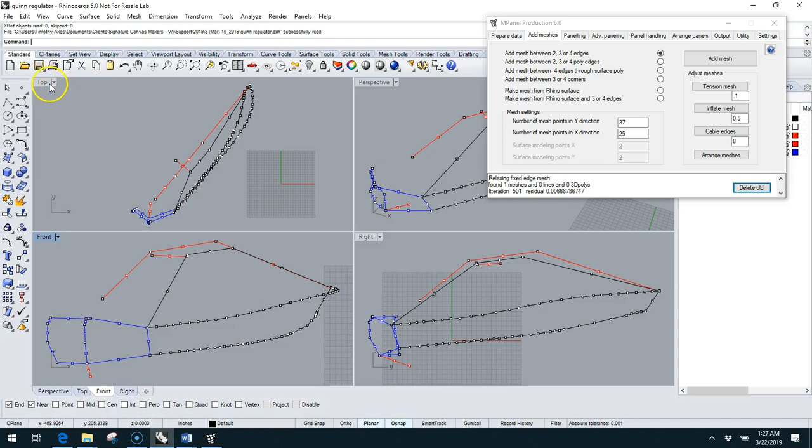What I'm going to do first is, and we're in Rhino, and so we've got a top view, a perspective, a front, and a right view. The very first thing I'm going to do is I'm going to go to the top view. And because this is taken on a boat that was probably on a trailer or located somewhere potentially off the water, we're actually seeing that the front of the boat is lined up towards the top of the screen.

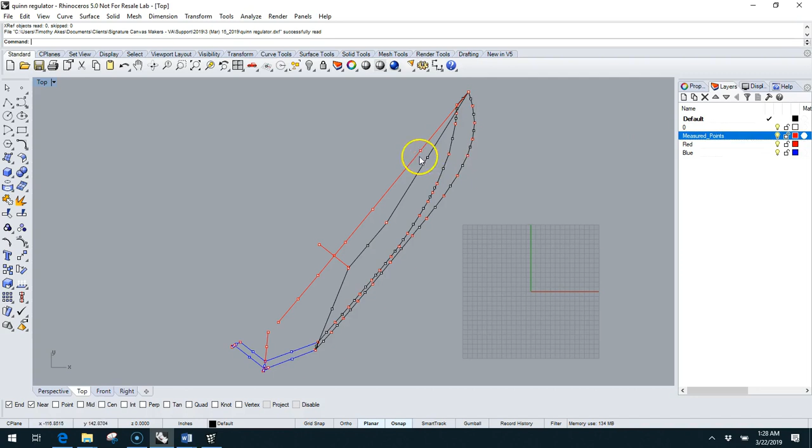The very first thing I'd like to do is make sure all the points are on. It looks like this has some additional points that were the measured points taken here. So I'm turning all the layers on, so that I have all the data. I'm going to select all of the information in Rhino, and I'm going to use something called Rotate 2D. So I'm going to left click on that.

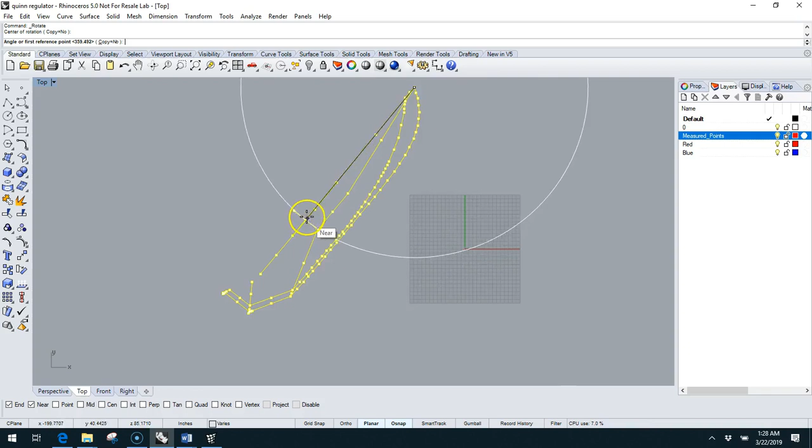I'm going to grab the top point up here, and I'm going to grab a point right here about the midpoint. I want to make sure my nearest is shut off. I want to grab actually that point. So on my O snaps, I'm going to make sure point is on. I'll grab that point, and I'll also turn on ortho. And what that's going to allow me to do is to rotate the boat so that the front of the boat is here.

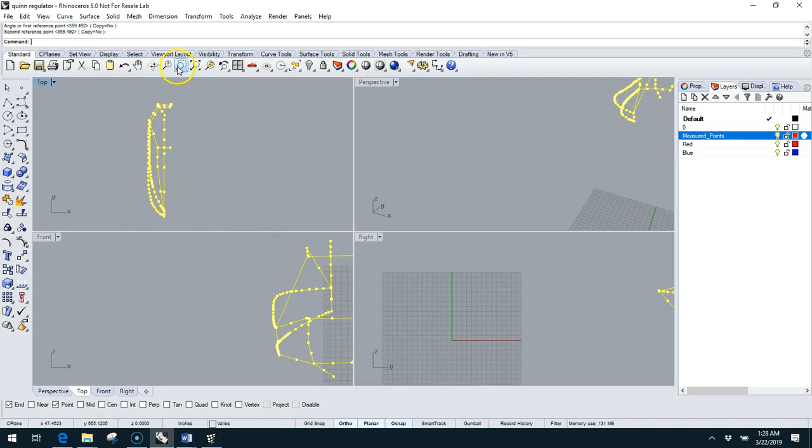And what that allows me to do now is, if I zoom extents on all screens, the front is going to be looking like I'm at the front. The sides are going to be here. What I'm also going to do is in the right view now, I'm going to grab all the boat. I'm going to click on rotate again. And from a right view, I'm actually going to rotate this information so that I'm ortho.

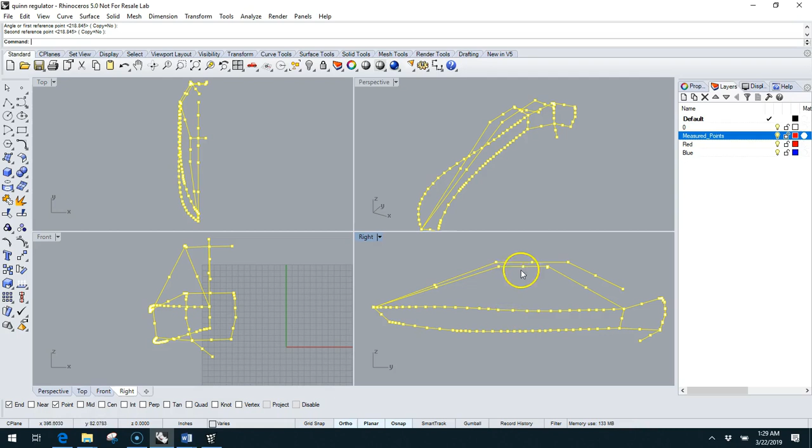So what I've done here is I've rotated the boat so that from a top view, I've got the center line of the boat straight up and down. Also, from the right view, I've rotated some of the lines so that I'm actually looking at a boat like from the right side. Okay. So with that being done, I'm going to go to the top view again. And all of this is happening in Rhino right now.

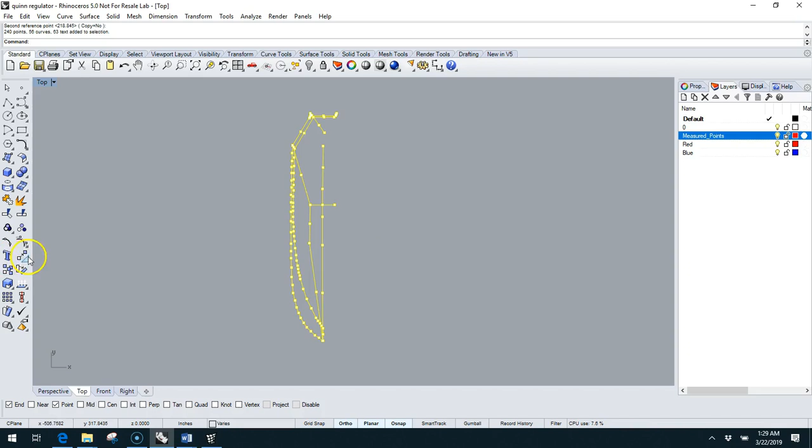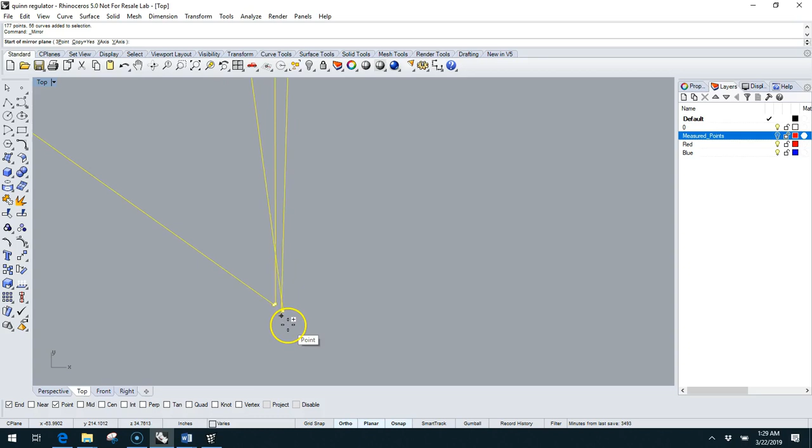So I've got half of the boat recorded. What I'm going to do is select the whole boat. I'm going to go ahead now and shut those measure points off and select it. And I'm going to use the Rhino mirror command. I'm going to mirror, and I'm going to grab a point up here at the front of the bow, and I'm going to grab the farthest most point. So I believe that's going to be right about here. And I'm going to mirror this boat to about that center point that we used before.

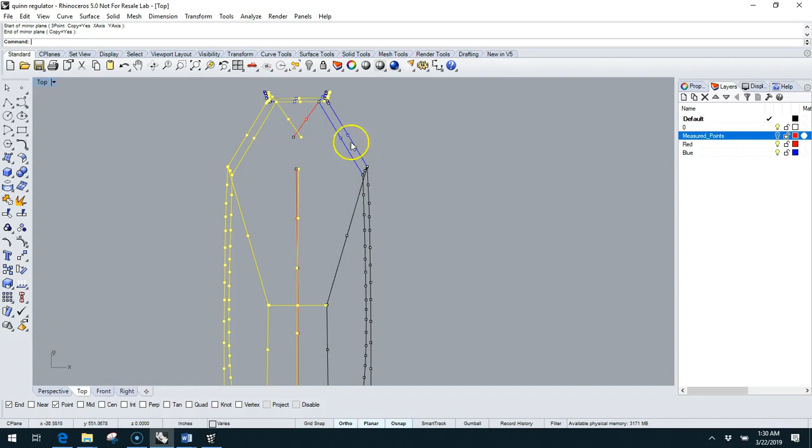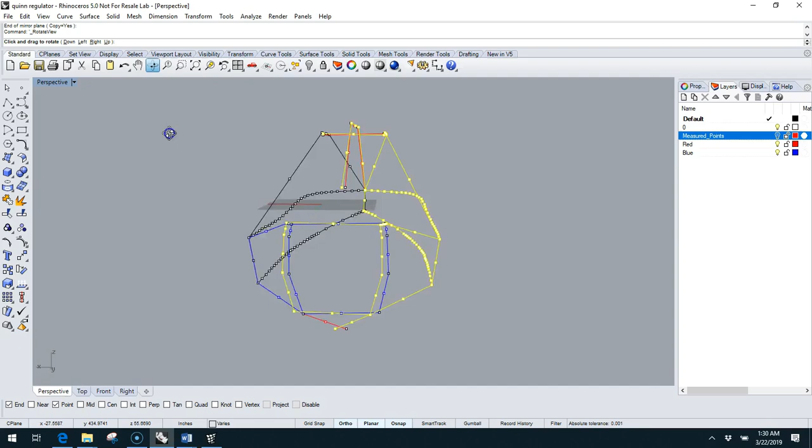Now, I see a couple of crosses here in this point, but if I mirror to about the middle of that T-top that's coming off, I think that's a really good approximation of where the center of this boat is. The center line typically should be right down the middle, but it seems to vary a little bit on this boat. I think that actually is a pretty accurate spot. If I take a look at this in perspective view, it looks pretty close, and I think the T-top's really good here.

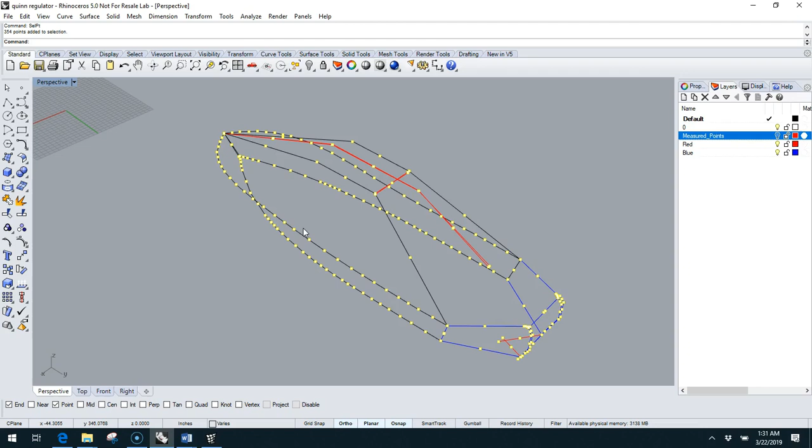Okay, now that I've got the boat mirrored, the one thing I've got is a lot of points on here. So I'm going to use something in Rhino called SELPT. Make sure I'm in the command line, SELPT, select points, so every point on the screen is selected. I'm going to just type hide, and that doesn't get rid of the points, it just cleans them up, it hides them.

The next thing I'm going to do is over on my layers tool, I'm going to right click on layers and say new layer. I like to call this layer trace.

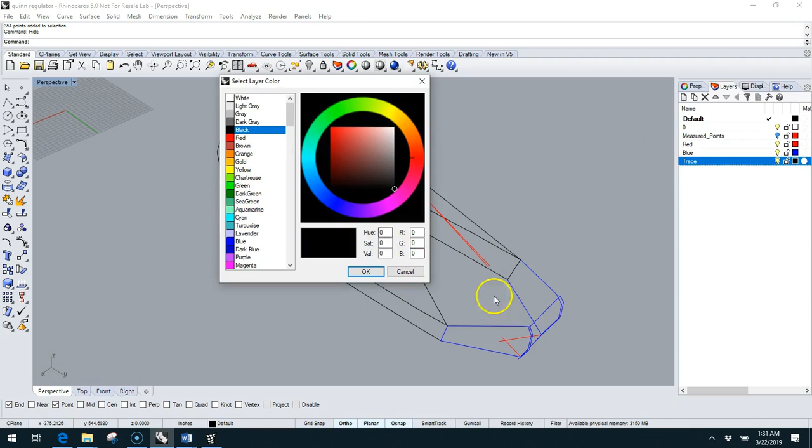I'll turn off my caps lock and turn on trace. I'm going to select a color that's not on my screen, I'll use green for this trace layer, then double click to make that my current layer, so everything I'm drawing now will be on a layer called trace.

So what I've done is take the data that was here. I don't want to destroy this data or start moving it around, like grabbing a point and saying it should be over here, because this is what was actually recorded from the laser data. I don't want to destroy that.

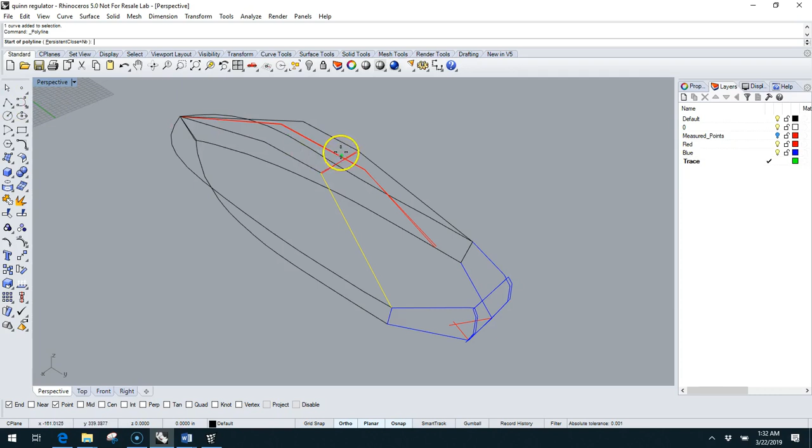But what I am going to do is start a layer called trace, and use this data. I'll go from this endpoint over to this endpoint, then come up over here to this endpoint, and start tracing this out a little bit, up to the very bow of the boat.

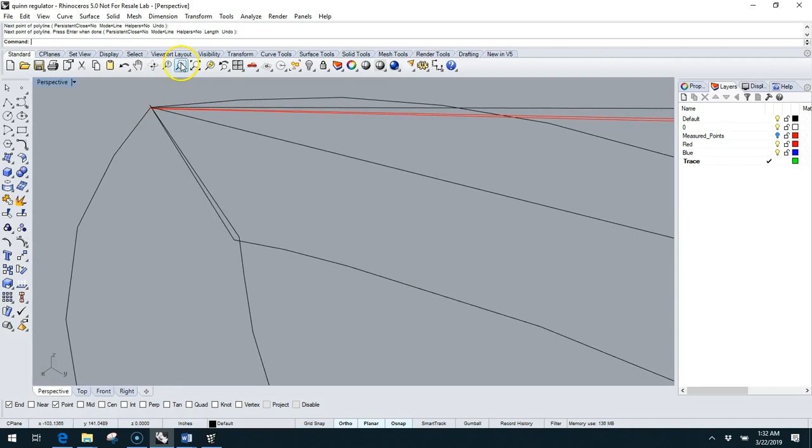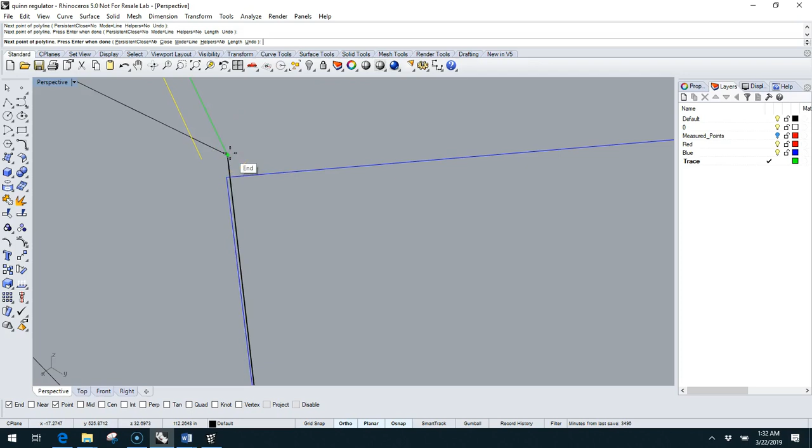I might even grab a window, and I want a line from that front line right there, down to the endpoint, and the endpoint right here. When I've got a situation like this where several points come together, I'll pick something about in the middle. Actually, that looks like a really good point to me.

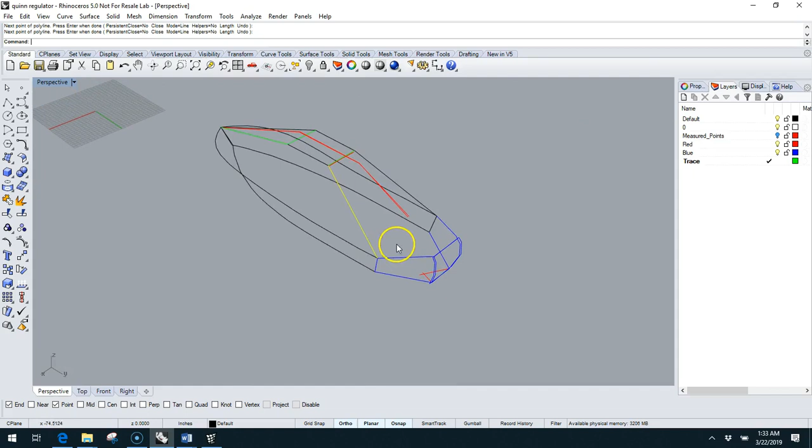Sometimes we're talking about something so close here that it's maybe just a sixteenth of an inch off or something, so that looks pretty good there. Let's come around and swing over to the other side here.

Again, I'm going to grab the polyline or line command, either one you want to use, and grab the endpoint of that green line. I'll come up to the endpoint of this one, then down here to the endpoint of this one, and again come down here.

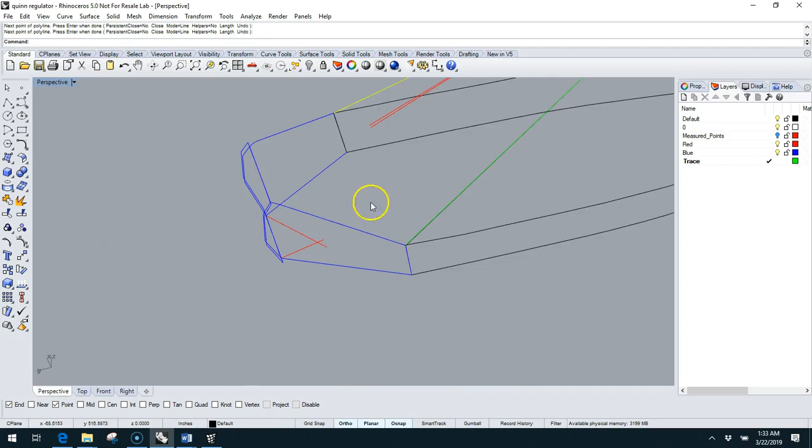I'm going to try to get, again, about the same point that I chose before, that blue line right there. That allows me to grab a line from the end of that green line to the endpoint of this green line.

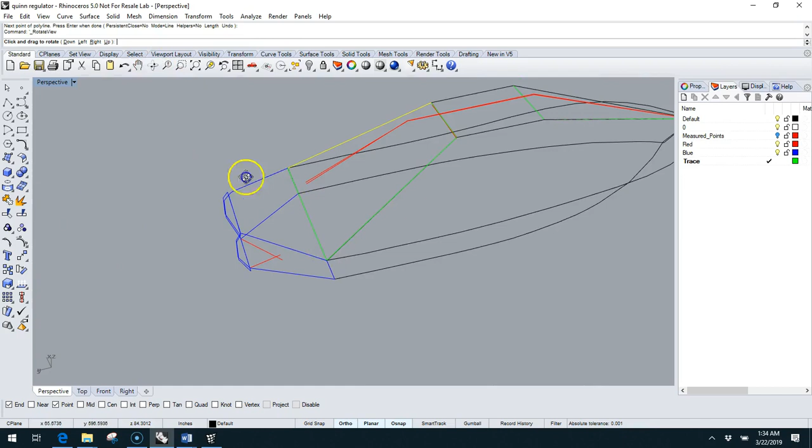Okay, let's continue on the boat. I've got several pieces selected here. Let's go to this back section, choose the line or polyline command, and grab that point back to.

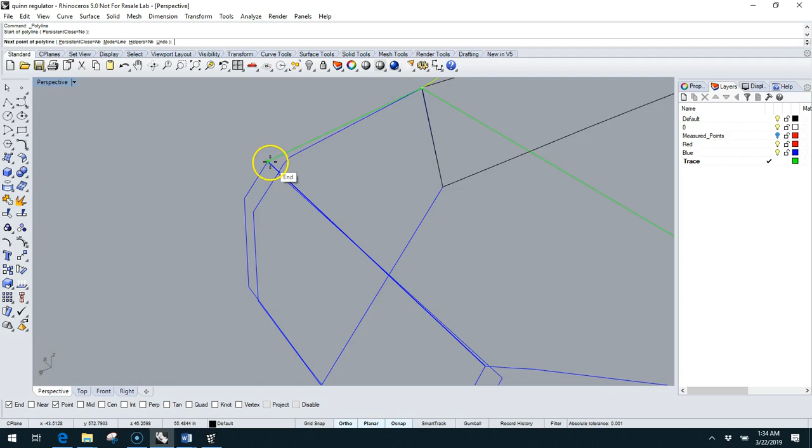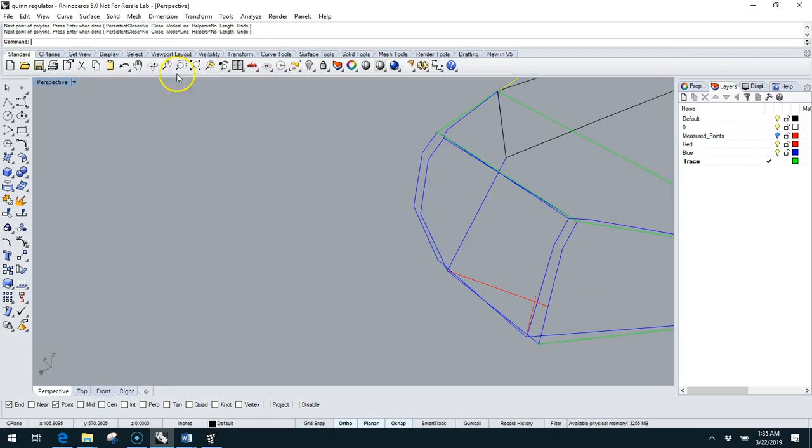Let's go from that endpoint down, out to this outermost point, and then we can follow the laser data up. Over here, let's get around a little bit and follow that laser data up.

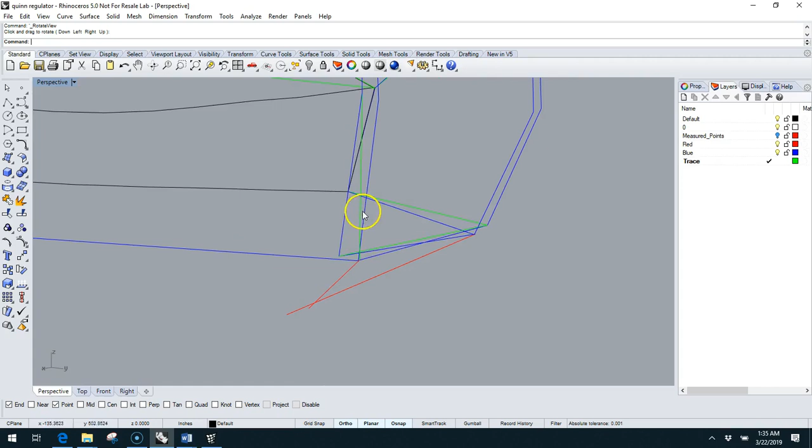Let's come over to the back of the green side here. I think right here I've actually grabbed the wrong point, so I'm going to come up here and use my curve point control points, and take that back over to the back side over here.

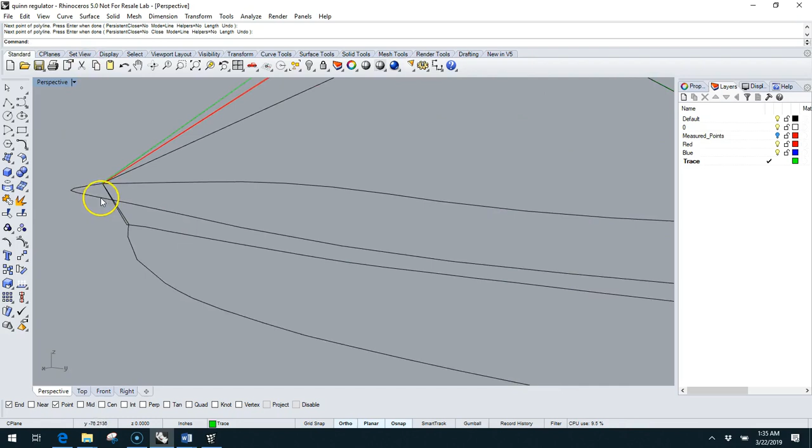From here, let's turn the control points off, grab the line command, and go from here to this corner, back up to those. Now what's pretty good is I've got this, let's go up to the bow up here in the front.

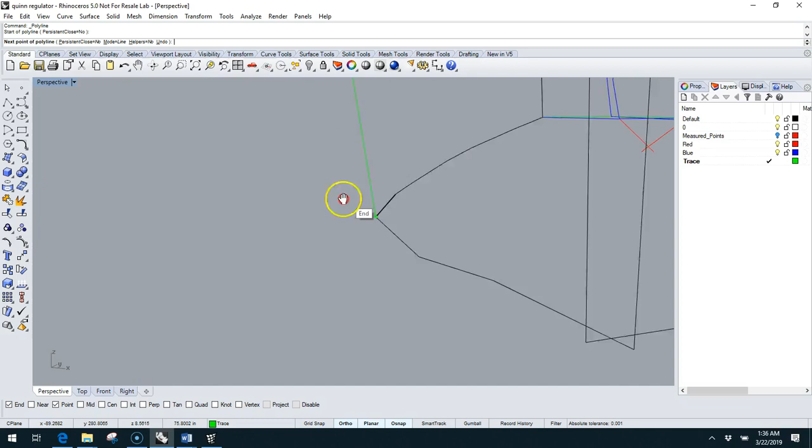I'm going to grab the polyline command, and go from the endpoint of my green line down to this intersection here. That looks like a good average between those two points.

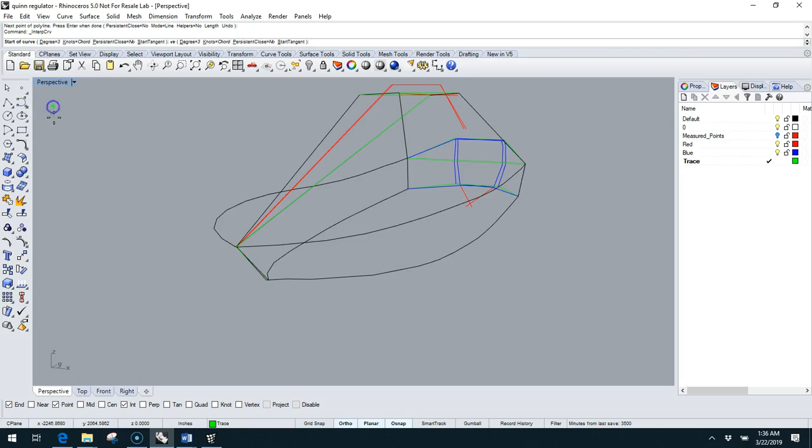Now I'm going to start tracing out and clean up these curved lines. For the curved lines, I'm going to click and hold on curve points, and come down to curve interpolate points. Let's start at the common bow line, which is my green line here.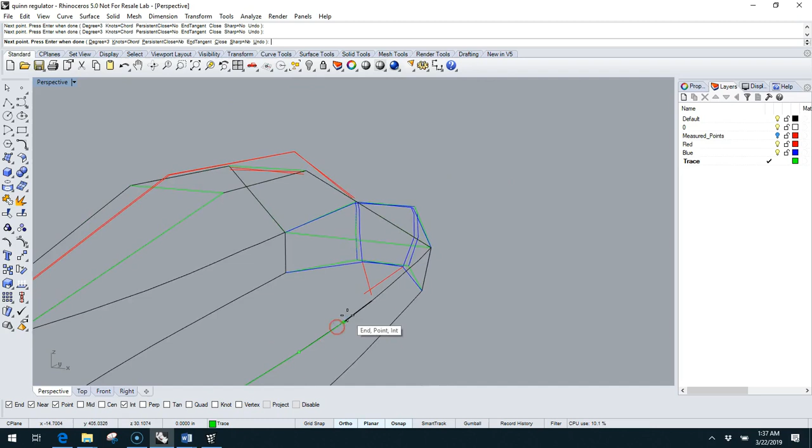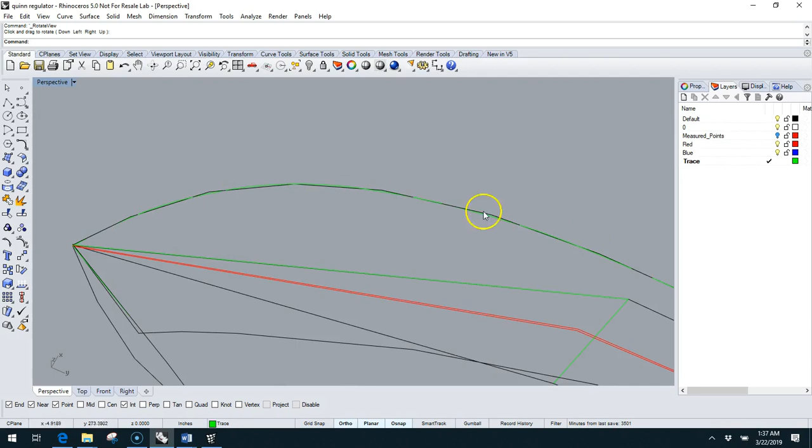For this, I am going to turn on the near object snap, and start working my way down following this line. You'll notice if I come down and grab about every 16 to 18 inches along that line, this looks like the rub rail line on the boat. I'll continue on, and at the end grab the endpoint of this. What that's done is given me a really good representation. I might be off a little bit here, but it's cleaned it up quite nicely and gives a good representation of the bow line.

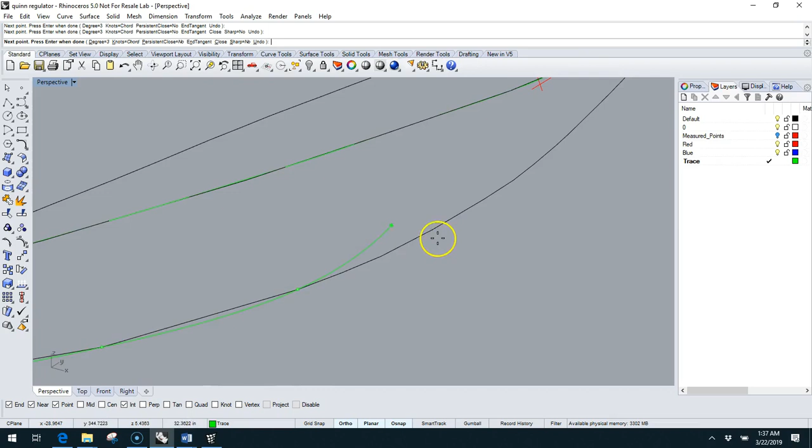Same thing on the bottom, using curve interpolate points, I'm going to grab the endpoint of the green line and start grabbing a few points. A lot of times the actual points taken are the high points, so I'm going to grab quite a few of the endpoints if I can, again about every 16 to 18 inches along that line until you get back to the endpoint, and done.

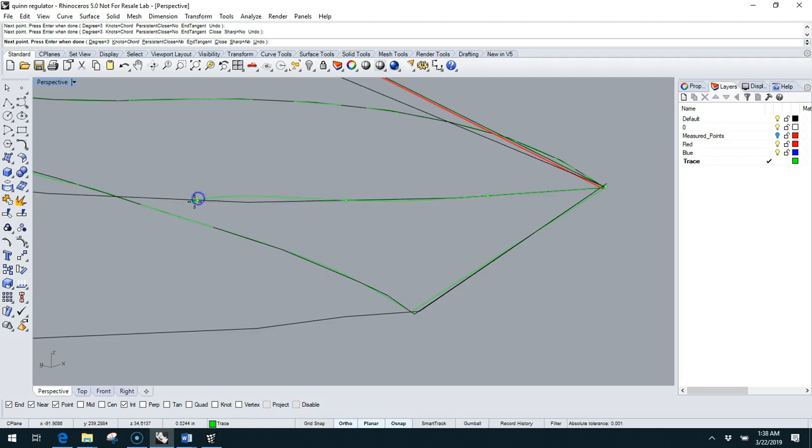Okay, that side looks good. Let's go back over to the other side and do the same thing. We're going to grab the endpoint - and I see right now I actually snapped to one of the incorrect points there. We're going to change that in just a moment. I'm going to start following my rub rail. Again, I'm not changing the laser data that was taken, I am just using it.

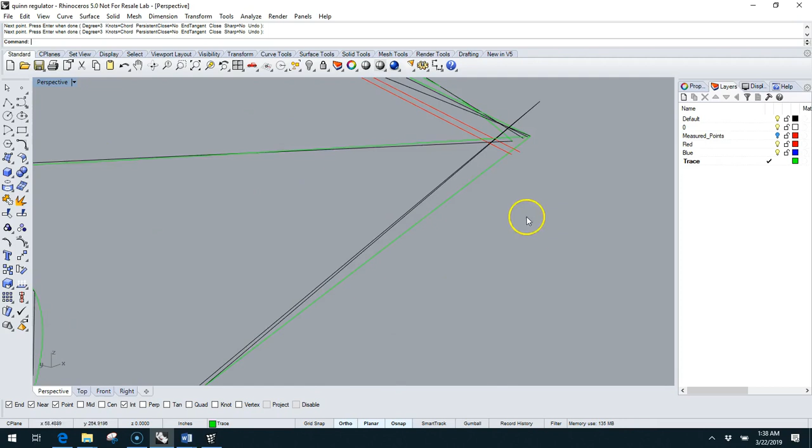Let's come here, and it looks like I've selected my first line. Let's turn the control points on. What's really great about Rhino is if you do something like grab the wrong line, it's very easy to correct that - I can just turn control points on and grab that line.

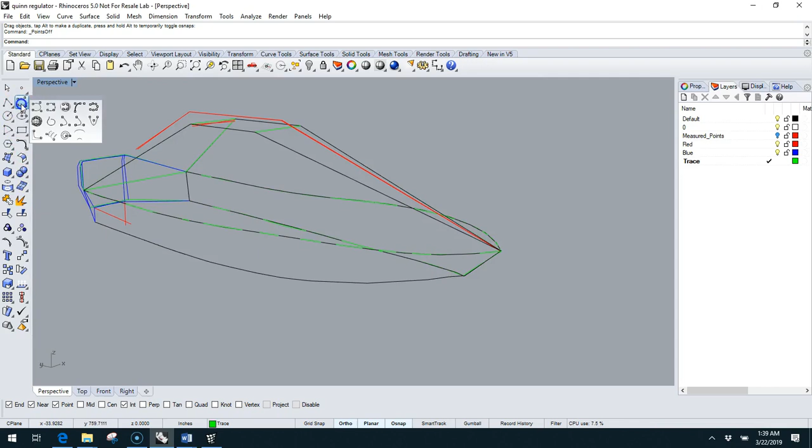All right, for the bottom, I'm going to go to curve interpolate points. I'm going to grab the endpoint here, and again, using most of the high points, like where maybe the laser was shot, I'll grab about every 16 inches along that and come to the endpoint.

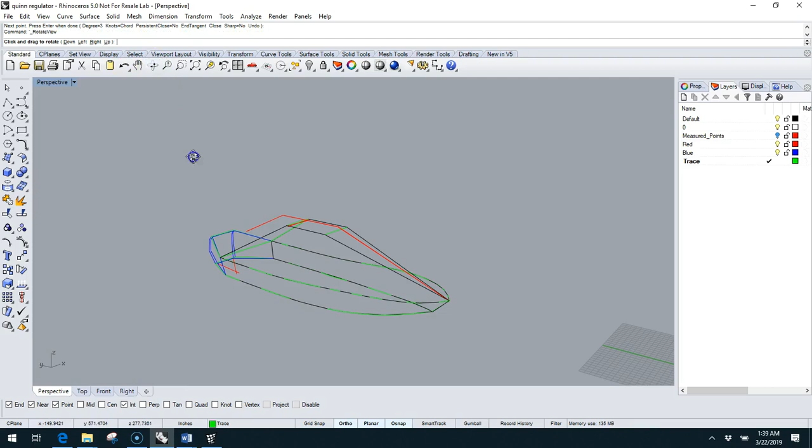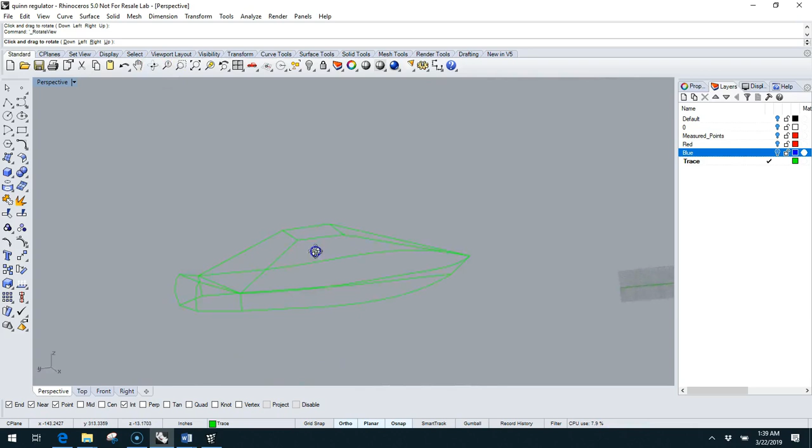So at this point, here's what it looks like I've got - it looks like I've got most of the data captured. What I'm going to do is come in and start turning off some other layers that we had, and you'll see that I have a pretty good representation now of the boat, and it's pretty much cleaned up - pretty much got a wireframe cleanup.

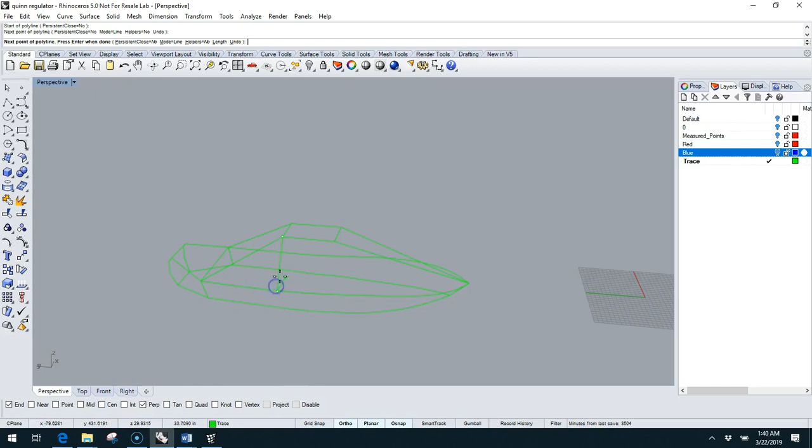Now, the one thing I am going to do is add a couple of additional pieces here. I'm going to add a line from here down, and instead of nearest, I am going to turn on something called perpendicular. What perpendicular is going to be is just straight down - a straight perpendicular shot from here down. Let's grab a couple of these lines perpendicular.

And what this is going to allow me to do is give me a little bit of extra detail in order to put my meshes in. Perpendicular, and perpendicular. So, all right.

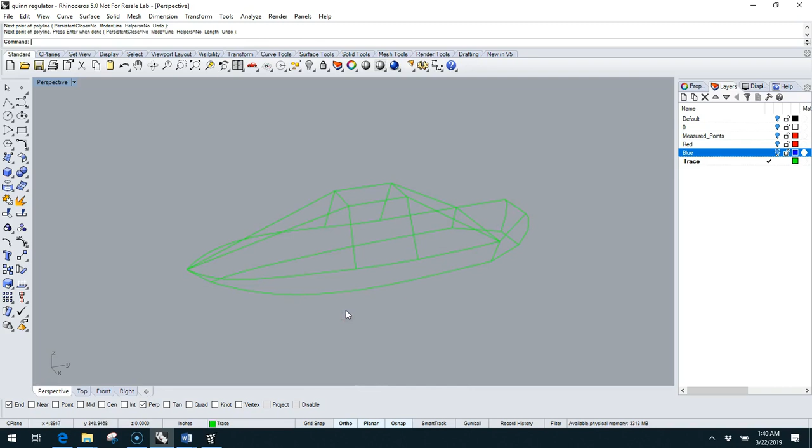So at this point, what I've got here is a cleaned up wireframe boat. All of my original data is still right here - if I turn the layers back on, you can see here's all the original data. But right now I can shut those off and just work with this layer called trace. And I am ready now at this point to start using this for some MPanel tools.

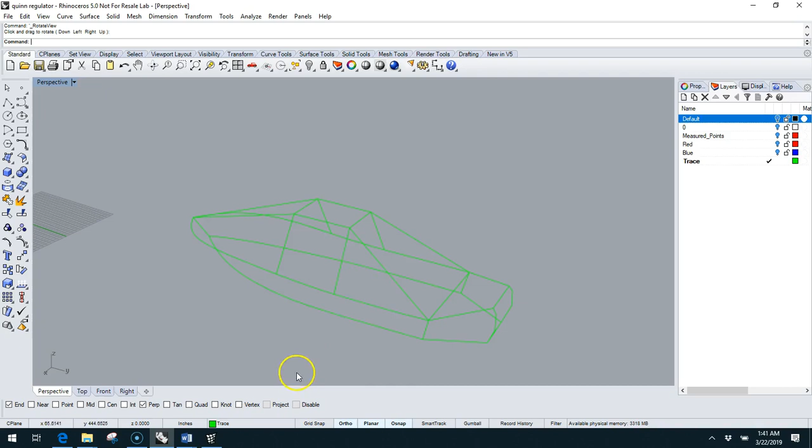All right, I've started MPanel-Production, and I'm using MPanel-Production 6.0. What I want to do here is, before applying a mesh, I need to start thinking about the zones and the areas that I'm going to deal with. Typically, you'd want a mesh that's not too dense, but not too light either.

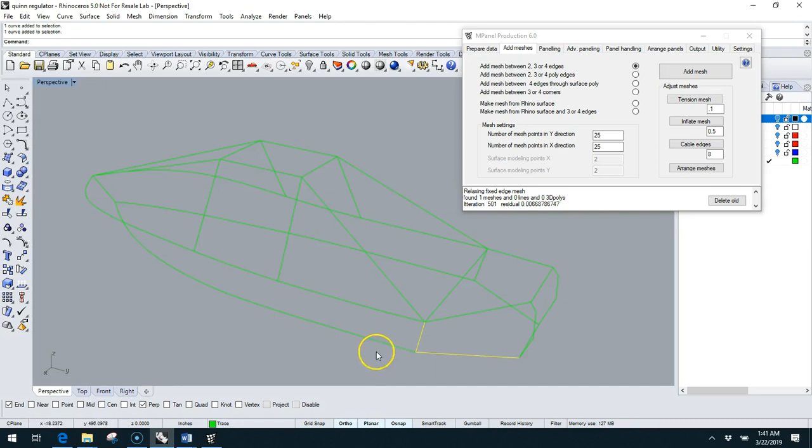We've got this long area right here. If I look at this data, that point right there, I used a polyline command on that. I'm going to choose a split command and select this other line because I want these to be individual lines. Same for this one here - split, choosing these two perpendicular lines. Now that is 3 lines. Same thing over here, split with those two, and now I've got 3 lines here.

I'm going to do the same thing for the rub rail, but first I need to apply the mesh on the bottom here. The one thing I'm going to do, because I'm going to put this on this direction, is this will be my bottom, right, top, and left.

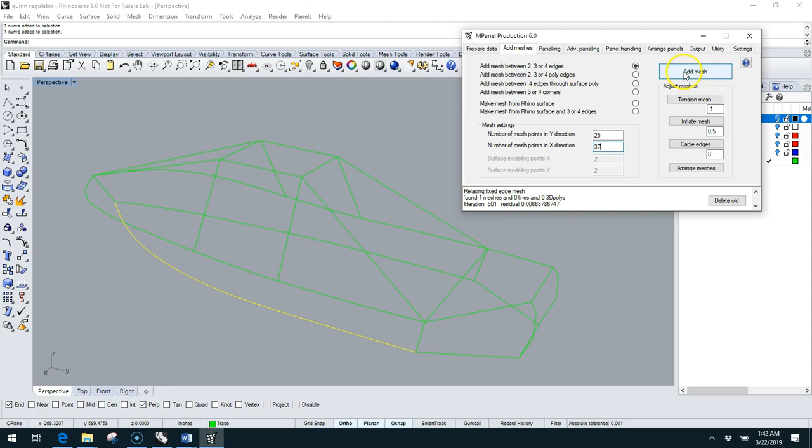I'm going to choose the bottom here and say 37 - I'm going to put a few more mesh points on the bottom. So I want to add a mesh between 2, 3, or 4 edges. I click Add Mesh, choose the bottom, right, top, and come back over to the left side.

Poor connectivity between top and right edges - that's asking me to ignore the gap, say no. If I zoom in here, I can see this line didn't quite get all the way back. MPanel is going to tell me if there's a problem. I can grab it, snap it right to the endpoint, right click to shut those off, and I'm good.

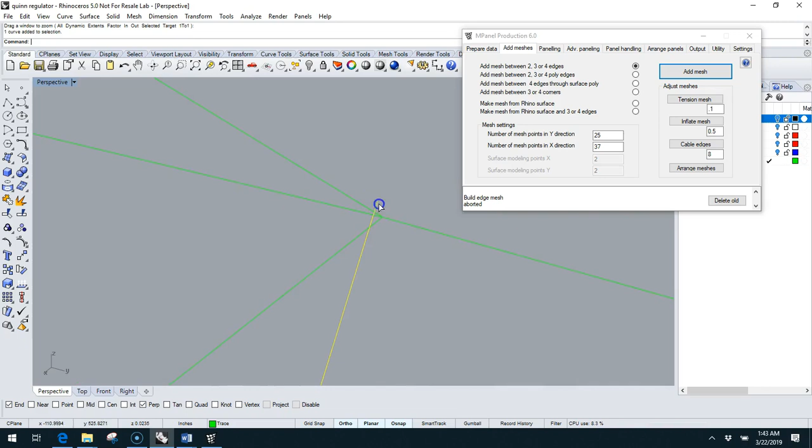Let's come over here and look. I think I'm good on this side. I'll zoom in a little bit just to make sure I didn't make that same mistake. And actually, I did make a mistake - right here, I can see that line should be snapped down to the endpoint. All right, let's shut those off.

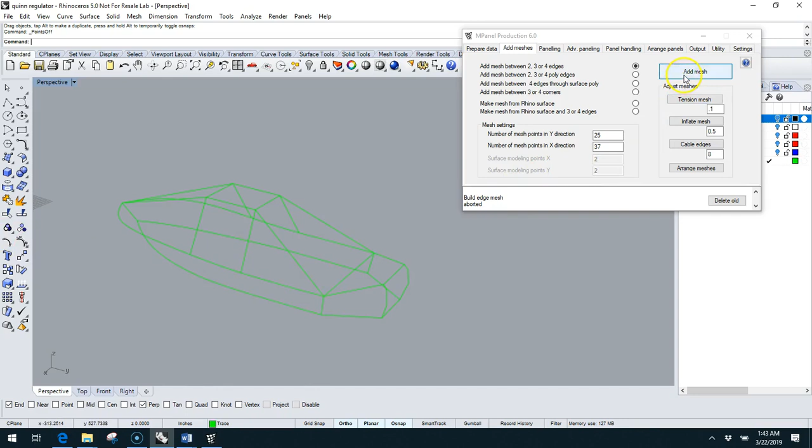So occasionally we are going to have some points that need to be corrected. Not a big deal - it's easy enough to grab that control point, left click that, go over, fix it, come back and right click it to shut it off. Again, bottom, right, top, and left hand side. Looks good. Let's swing around to the other side.

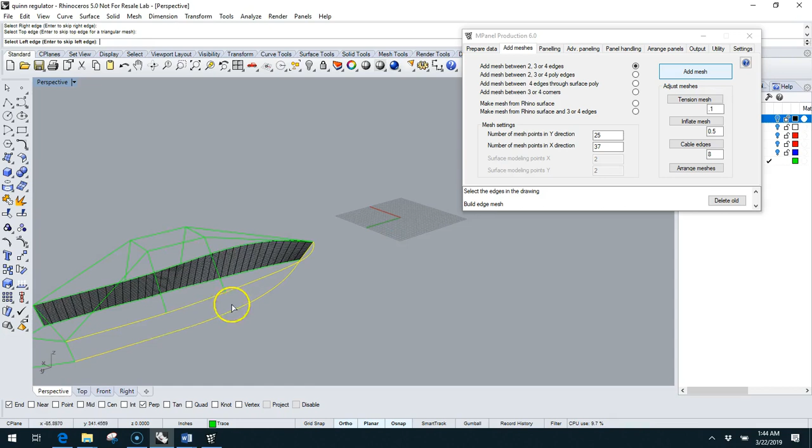At this point we'll do the same thing. We'll choose the bottom. This time the right is the bow line, top is the rub rail, and again I've got this part back here - say no, I didn't check this before.

I'm going to say let's split this. Use the split command, let's choose the rub rail and this back line right here. And now those are independent pieces.

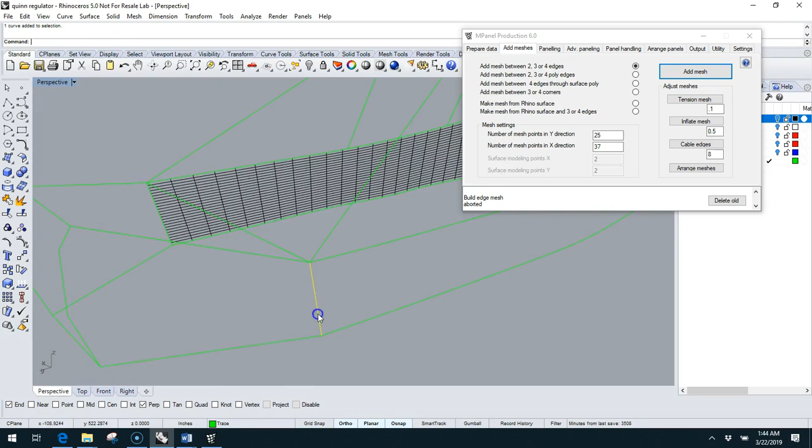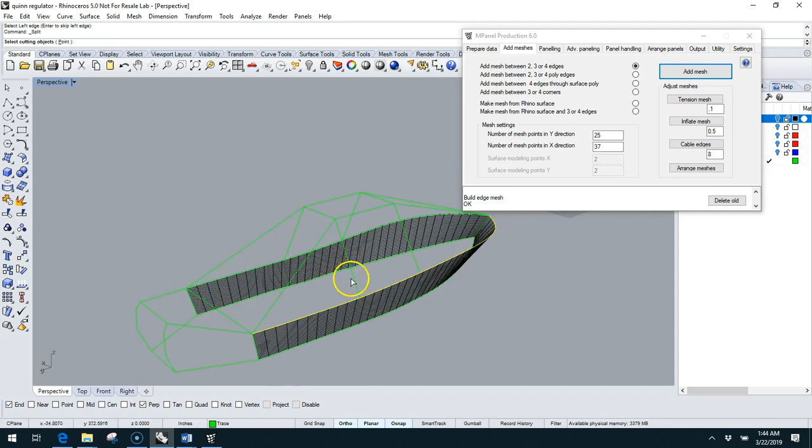Now I can click Add Mesh, bottom, right, and I'm going to choose the line. Top is the rub rail, left is this side. So now that I've actually used that, here's what I can do - I can select that line, say split, and now I can use those same perpendicular lines so that same rub rail I just used, and we'll do the same thing on both sides.

I'll select the rub rail, I'll choose split, I'll choose both those vertical lines, and now that rub rail - you know, I wanted it one piece for the bottom here, but I don't want it one piece for the next lines.

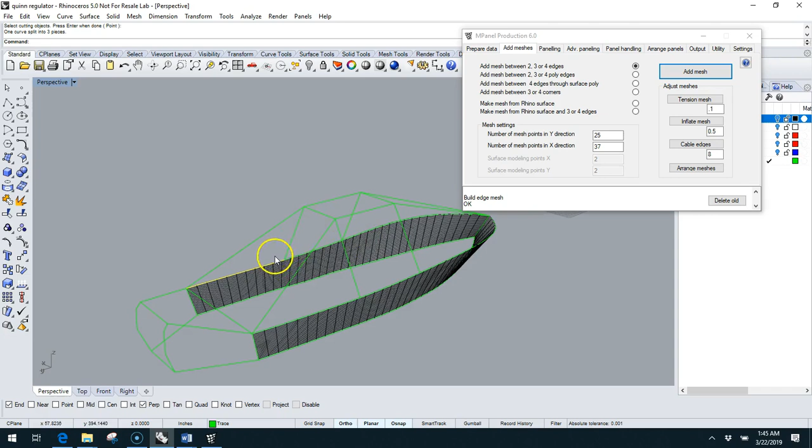So let's work around the boat a little bit here. I'm going to change back now, and I'm actually going to say 25 by 25 here, to get everything pretty much roughly to a uniform point. I'm going to say Add Mesh - the reason I used 37 here is because that's a longer run, I wanted more points on that. I'm going to say bottom, right, top, and left.

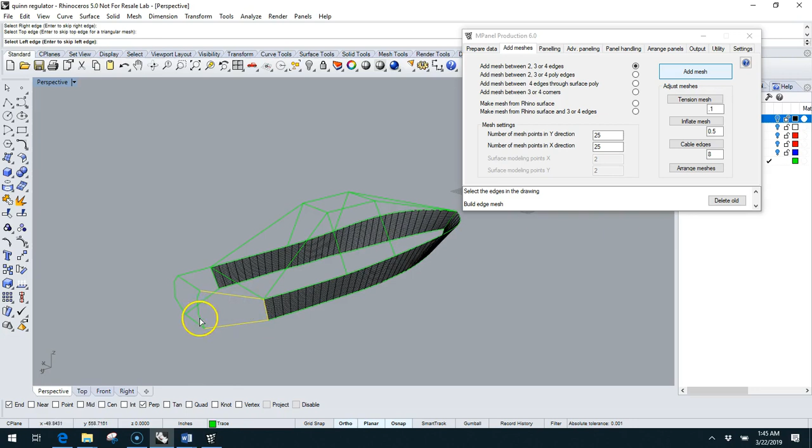Let's swing around, let's do the back side - bottom, right, top, and left.

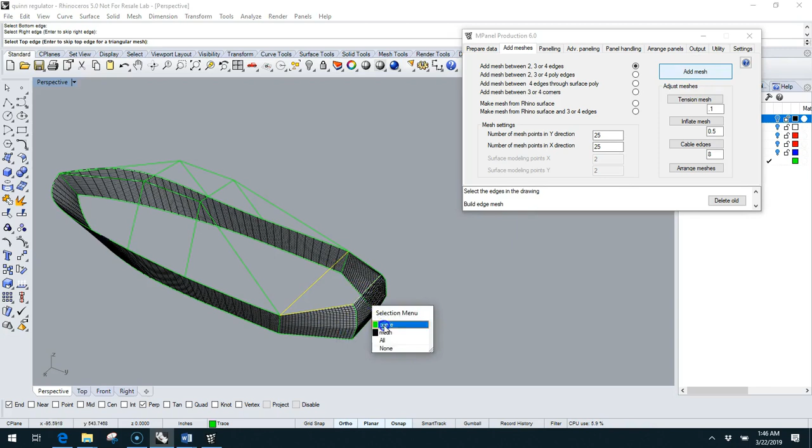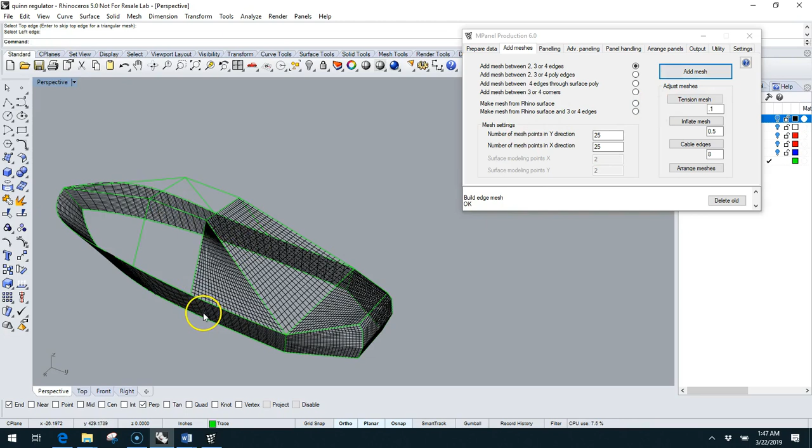So let's click on Add Mesh. I'm going to say bottom. I'm going to say right. Now, this comes to a point, so I don't have a top. I click Enter to say none for the top. Pick the left side. And that option was here, Enter to skip the edge. All right. Notice I'm rotating the boat so that I can kind of see all the edges.

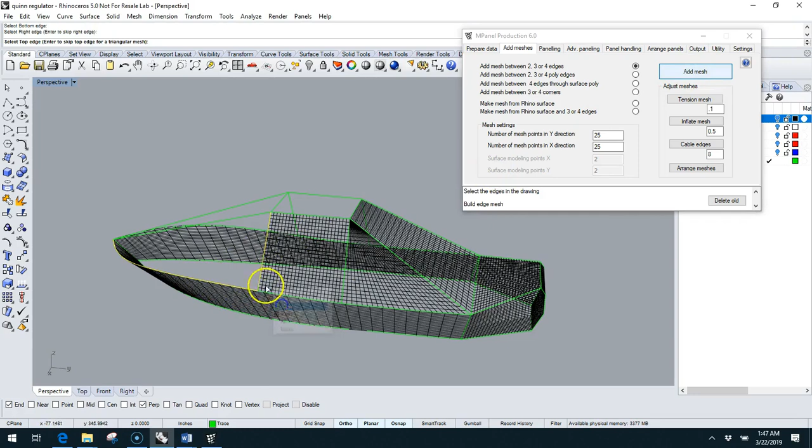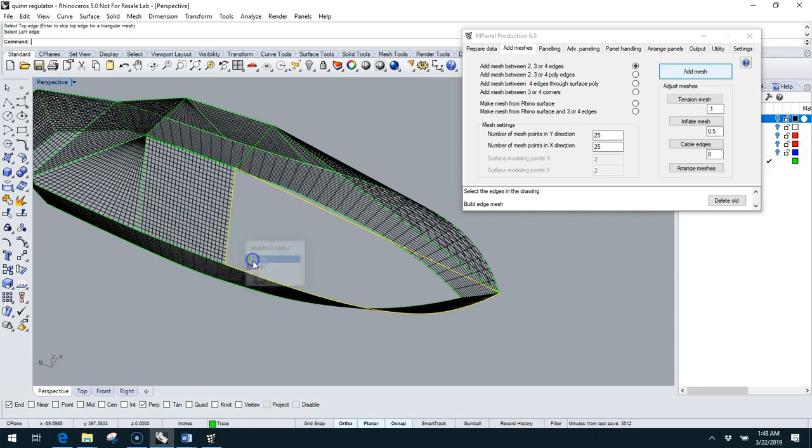Bottom, right, top, and left. And this one here, I'm going to say bottom, right, no top, and left. Let's do these last two pieces on here.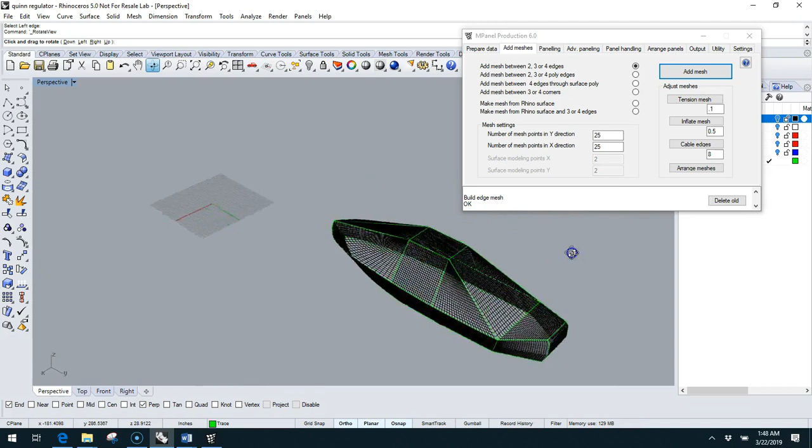So here in just a few minutes, what we've done is we've completely cleaned the boat up, and we've wireframe meshed it. Now at this point, I've got a couple of things. Number one is I know that probably up here, these lines do not exist. These are just lines that were taken. So there's a couple areas on the boat here that I think need to be adjusted, and adjusted by adding tension. If you take a look at the boat and go to, let's say, a rendered view, you're going to see that I've actually got a hard line right here.

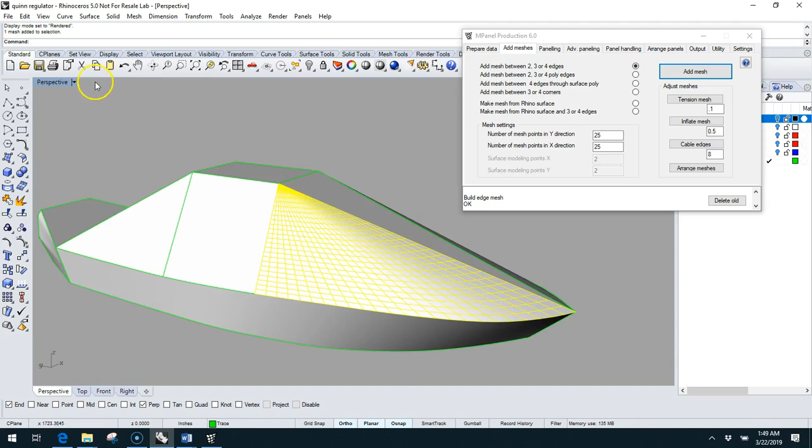And I think all three of these pieces, really what needs to happen is this. I'm going to choose these three meshes here. 1, 2, and 3. And I'm going to go to Utility Tools. I'm going to choose Join Meshes, and I'm going to say Modify. They go to red. I'm going to say delete the old. And now, if I choose on that, that's one mesh.

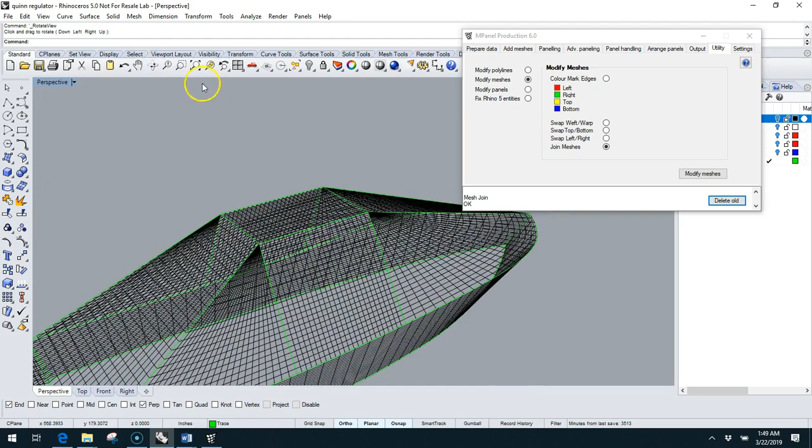Okay. Let's do the same thing on the back side here. Make sure I can see all those meshes. I'm going to hold the Shift key down, choose all three of those, and say Modify, Join, delete the old. Alright, so I've got a single mesh here and a single mesh up front. I'm going to click on the front. I'm going to go back to Add Meshes. I'm going to go to Tension Mesh. I've got this set to about 0.1.

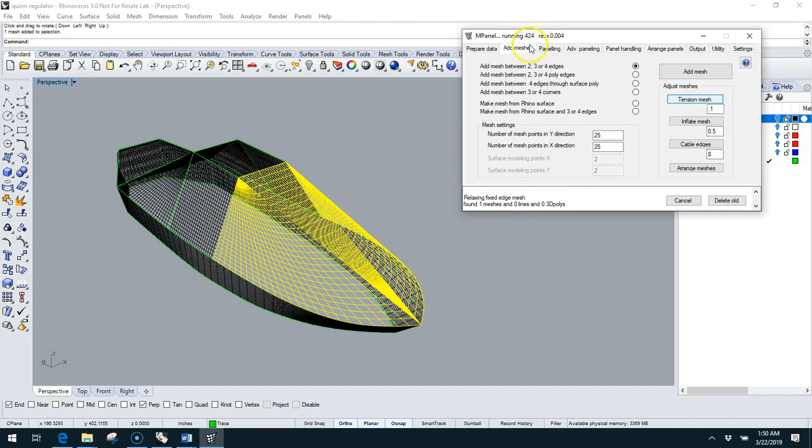And what that means is I'm pulling 90% of my tension in the warp direction and only about 10% across it. Okay? And so what I'm going to do is I select that mesh and click Tension to Mesh. It's going to run through its algorithms, and here's what's happened. You can actually see it's going to dip that fabric down. If I click Delete Old, you'll actually see that's the true shape it's going to be. So that actually creates the shape up to that T-top that I really want.

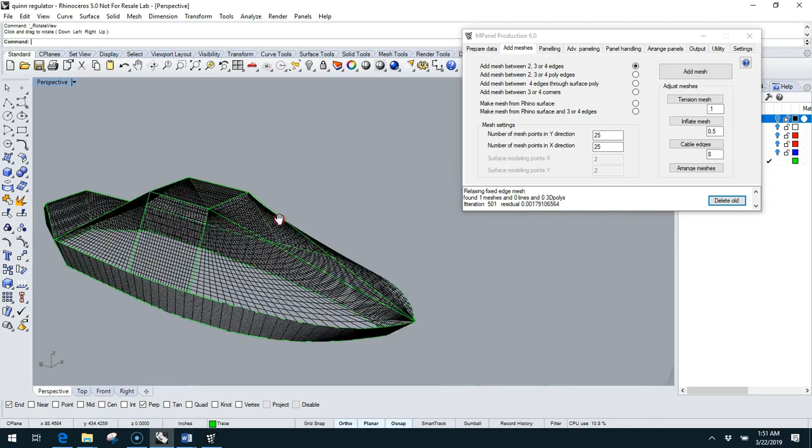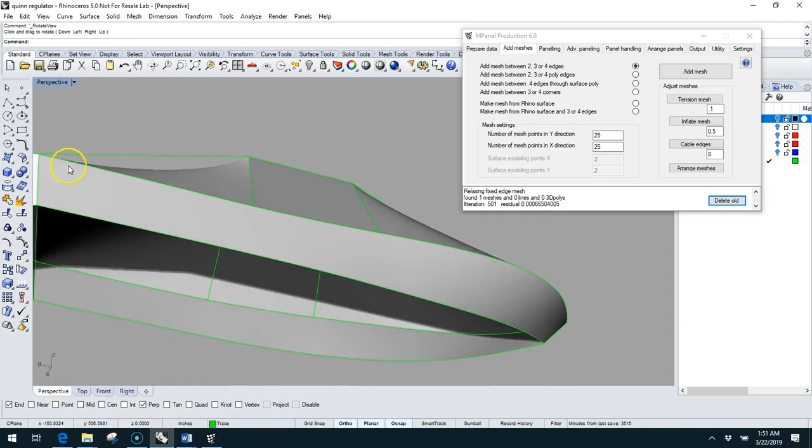Okay, let's do the same thing on the back. I click on the mesh. I click Tension to Mesh. And again, click Delete Old. And if I go now to a rendered view, I think you really get a good view for the shaping that imparts. And that's really where the cover is going to shine. It's going to make it look great.

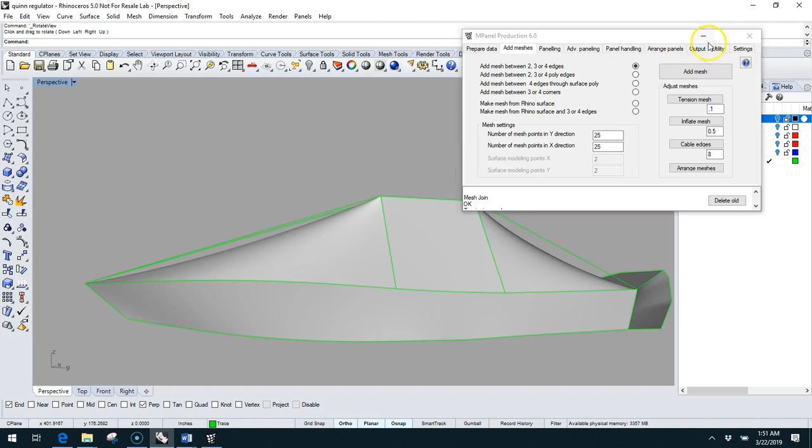So anywhere it's not supported, like from the rub rail down, we don't need to do it. Pretty much from a T-top down in this area on this mesh, we don't need to relax that either, because that's actually an area that's shaped in really nicely. Let me minimize this for a second. And so what you can see is that anywhere, like from a rub rail down, where it's not supported, we don't need to do that.

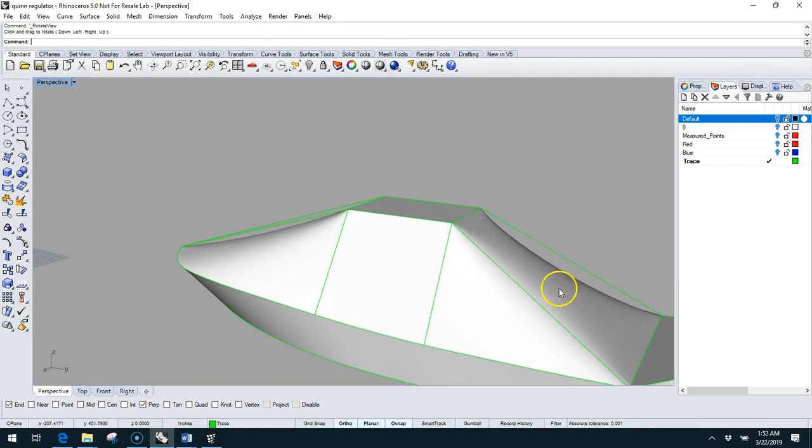But anywhere like behind the T-top or in front of the T-top, anywhere there's not that hard line, where there's not a piece of frame, the fabric's going to be allowed to sink down on that. You're going to be able to create a cover that's going to look really almost like shrink wrap. It's going to be really nice. And I think you'll agree that's going to be a really, really sharp piece.

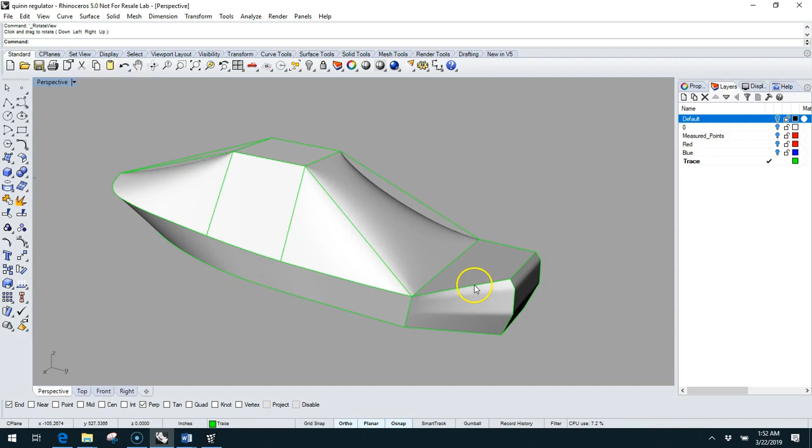That's how I would mesh this boat, and first clean it up. Cleaned up all the wireframe using the trace layer, and then applied the meshes to the boat to create this. The next step is you can just start to use the MPanel-Production tool, the paneling tool, to create panels from each of these meshes, and take it from there.